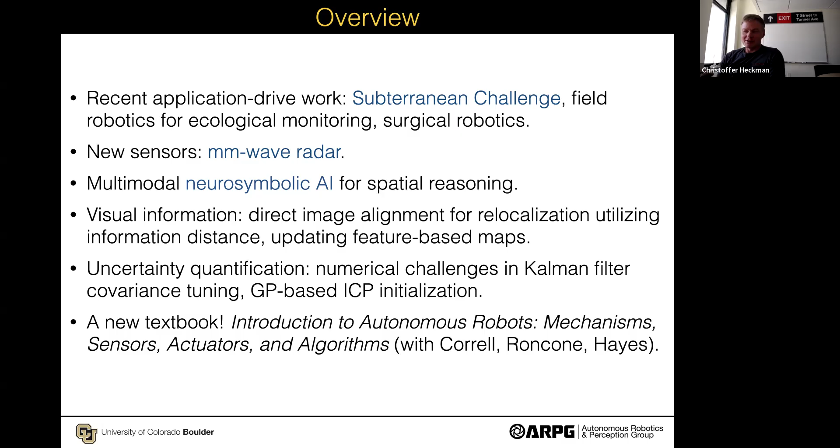The point of that book is really to give you a very gentle, colloquial introduction to the field, but also having rigor in places where you might need it. Honestly, I think that if you're pretty savvy with linear algebra and calculus, reading that book probably takes like a weekend, and that might be something of interest to you. You can just go online and compile it.

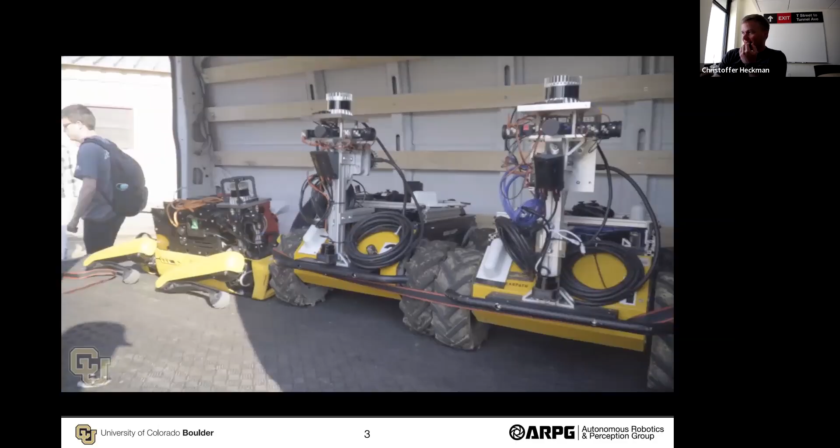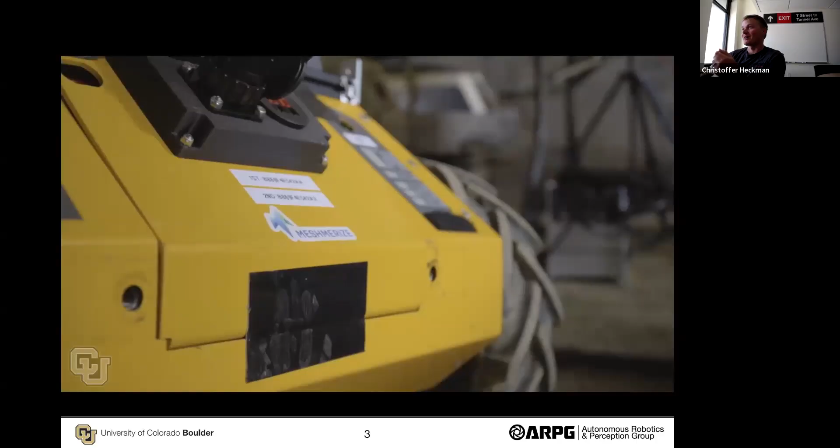So I wanted to give you first this montage. It's a video created by one of my undergraduate students of a deployment we did with some of our experimental robots for the DARPA Subterranean Challenge last year. You'll see a few things here, like that we actually go out to different sites and people wear hard hats and reflective vests, and there are robots moving around in environments that have never been explored by a robot before, at least.

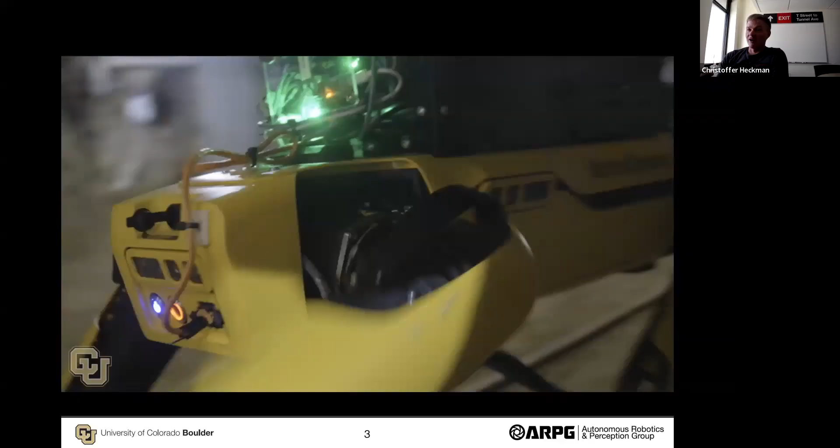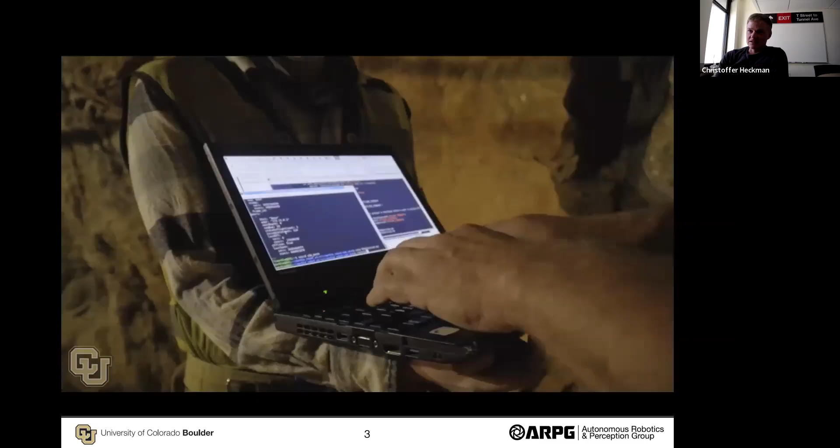This is a mine in Idaho Springs. In this case, this is one of our test deployments, a place where we collected data and refined our algorithms multiple times before participating in the DARPA Subterranean Challenge, which was a large, $80 million program from DARPA. There's a lot of dramatic music in the background that you're not hearing, but essentially we built these robots to autonomously navigate in this space.

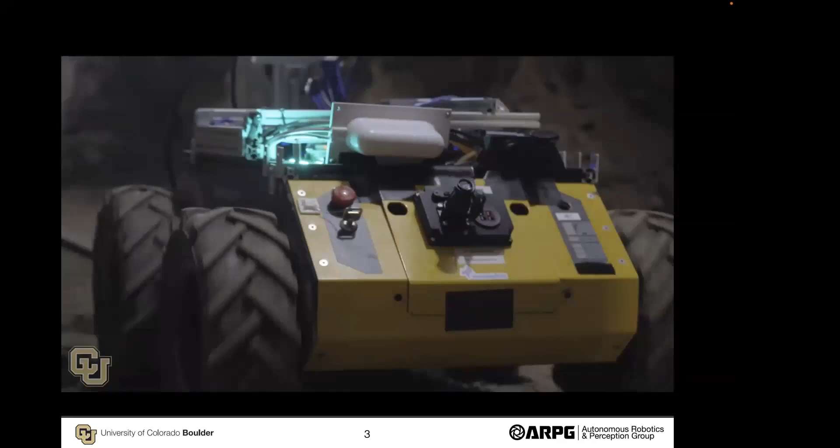And the reason why these humans are there—these are PhD students, master's students—is that they are actually looking at what the robot is doing and trying to evaluate their behavior, to see whether or not they're doing what we expect them to. A couple of different video clips follow.

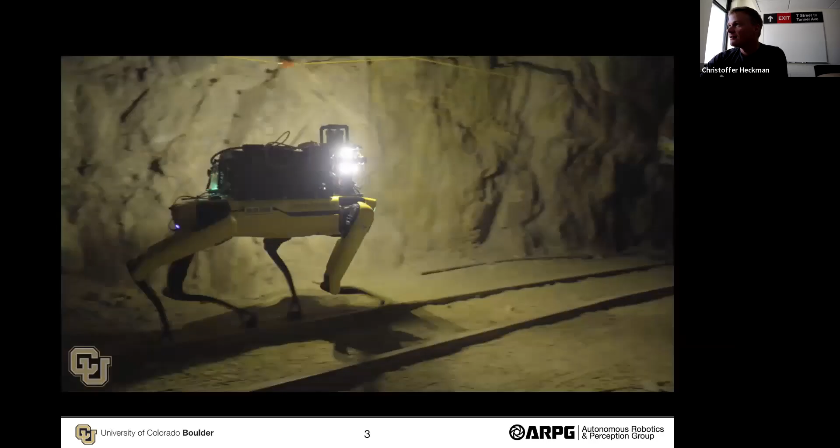Can you hear me still? I can't hear you if you're talking, Rashi. I can hear you. Okay, great.

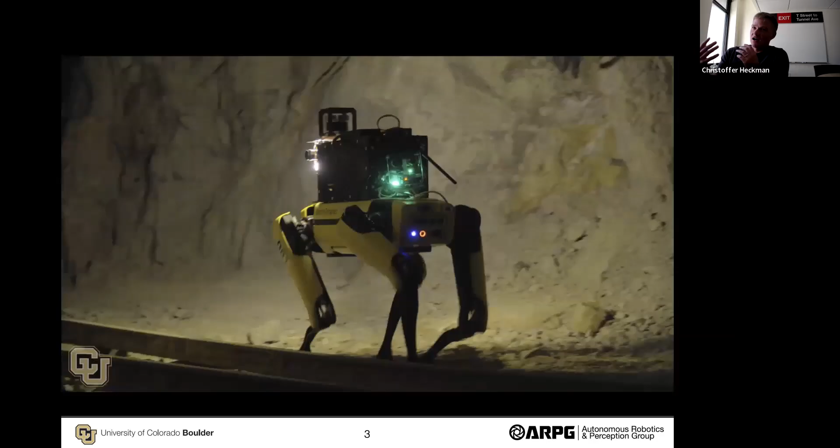So I got a button that said... anyway, someone asked me to unmute. Okay, so these robots are basically using different sensors, autonomously operating here. We have a couple of different robots that we use for this competition that are still being used for much of the research that we do.

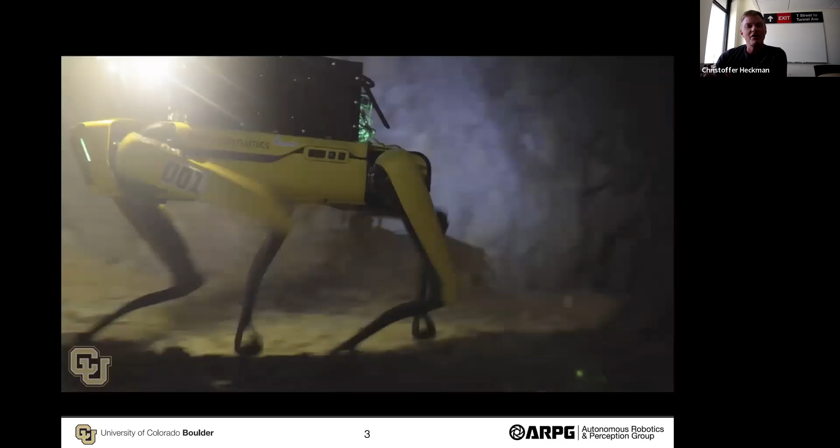We're not as interested just in subterranean tasks. That was a very motivating experience for us for this particular project, but this was actually just one of the many field robotics types of exercises that we do in our group.

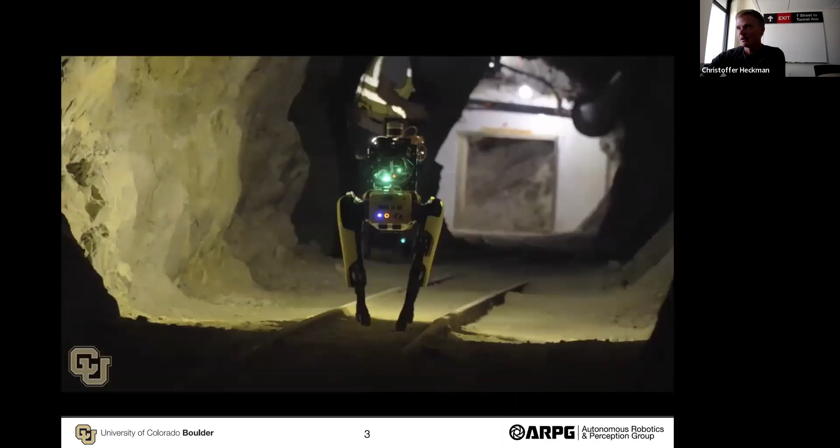So like I mentioned, this was actually part of a large competition, and our group does participate in national or international competitions that are usually hosted by sponsoring agencies like DARPA to be able to go and build and deploy these robots. A large part, like 99% of our work, is the actual building and development of algorithms that support a particular application. And then the last 1% is actually competing, which is kind of fun.

Although, you know, it's always a crapshoot whether a robot will just explode - not literally, but figuratively - just fall apart and won't know what to do.

And one part, the reason why I'm showing this picture here is because we actually do a lot of human-robot interaction work implicitly as a result of the work that we do in my group. So here's a human - we were allowed one human to interface with this whole system. And the system thereby needed to be quite autonomous.

And even in places where it was deep underground, we had no comms to the robot, the human had no power over that whatsoever. And now the robots have to work completely autonomously, or fail completely autonomously, as the case may be. But, you know, one human was allowed to have interaction with that.

And that human interface that you see here, it was not a big part of our work. It was actually pretty much built on prior libraries and everything. But the way that we designed the interfacing with the human is in itself a very deep research area, one that is also explored by Brad Hayes and Alessandro Roncone, two colleagues of mine.

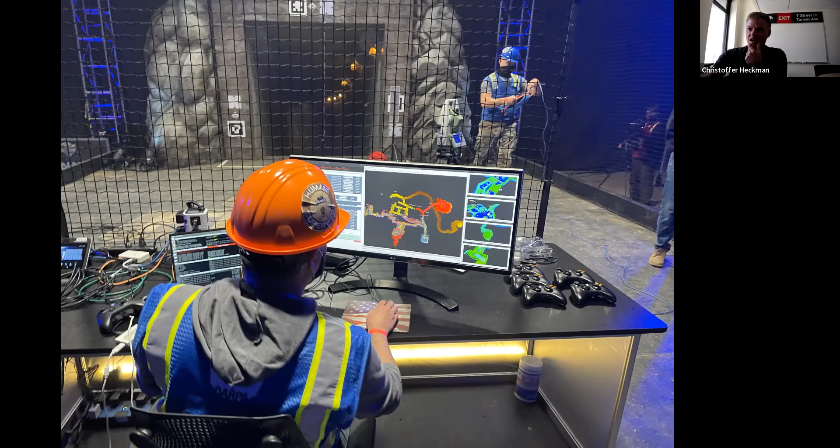Just to give you an idea, this was pretty hard, and I want to show you why I think it's hard. One of the reasons is that you have multi-scale types of behaviors that need to be exhibited by robots in these environments.

So this is one kind of algorithmic problem that you could imagine scaling in different ways. Those sorts of algorithms for planning and sensor perception, or the consumption of sensor data into data products that could then be used for navigation or other behavioral systems, is really the fundamental work that goes on in our group - not the building of platforms or sensors, but the algorithms that power perception and decision-making in these environments.

And just as another example, the types of environments we're looking at are not just quote-unquote fields, right? They're not just these places where there's some kind of natural thing to explore, working in a desert or something. They're also urban and built environments.

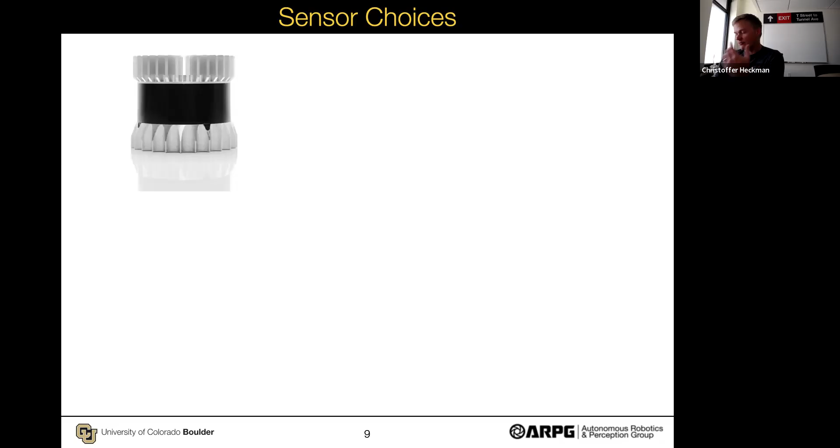When I talk about perception, I want to give a little bit of context to that. We are very interested in my group working with automotive LiDAR, working with cameras, and how we are able to parse camera data using machine learning techniques, especially modern techniques like visual transformers, and contributing constantly to that field.

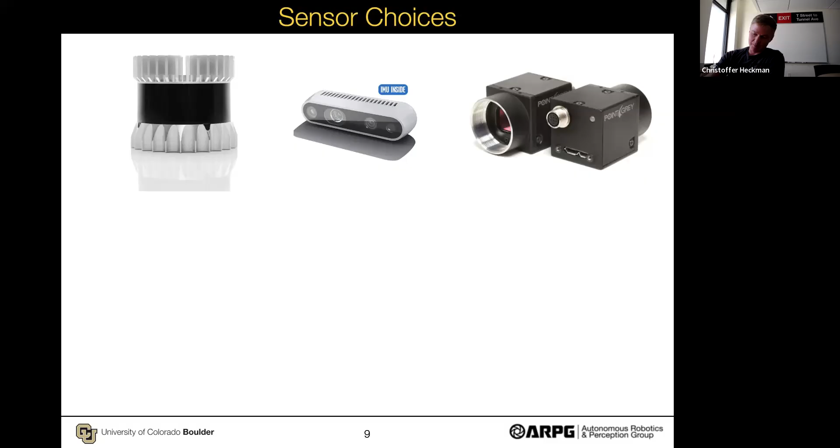We use commodity cameras, not just machine vision cameras, but ones that are cheaper and can be placed everywhere, like these RealSenses that have onboard vision and depth sensing based on stereo algorithms. We use GPS if we're outdoors, if available, and we use inertial measurement units, and the fusion of all this data together is what provides us some idea of where we are and what we're looking at.

And the co-location of these data is actually a very interesting problem from a machine learning perspective too. That is something that we focus on.

One area that is not as well researched in our view is radar, so I want to talk a little bit about radar here. Radar has been around for a long time. I'm sure many of you know about radar, but millimeter wave radar on a system on a chip that has been fabbed into a sensor, that is actually a very rare sensor. That's something that's only come about in the past 5 years or so. And so that enables us to be able to do perception with these small packages of sensors.

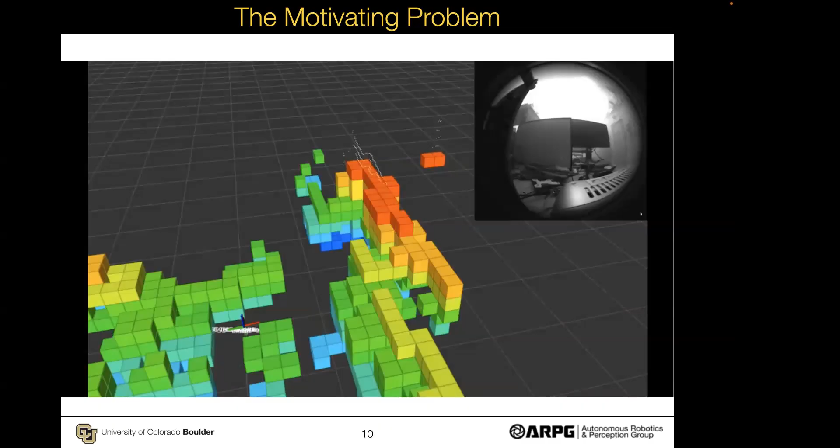So what I just showed you, if I can show again, is comparing how LiDAR and radar work. In this video, it was just this camera front-facing view, in a completely pristine environment without any fog or obscurance, a LiDAR map can be pretty dense on the surfaces of the environment, which means you can actually see where you're going and be able to use LiDAR. But in cases where there's heavy obscurance like this fog, that rainbow colored map just completely washed out the entire scene.

So what we're interested in is trying to solve problems where we can use other sensor modalities such as radar to be able to do mapping and localization in environments like that.

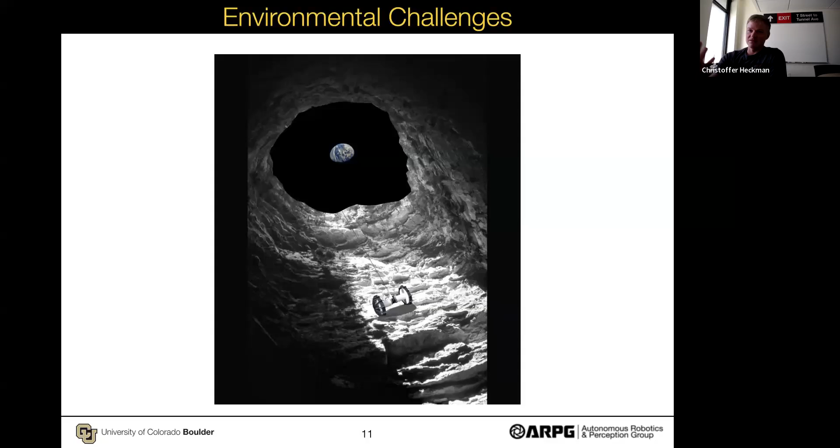And it's not just for environments such as built environments where there's some sort of disaster going on, or foggy environments like driving on a foggy day, but also places like this where we are trying to go and check out caves on the moon or on Mars, and you see all this haze, and how far can a LiDAR possibly go here? What does radar mean as an alternative for sensing?

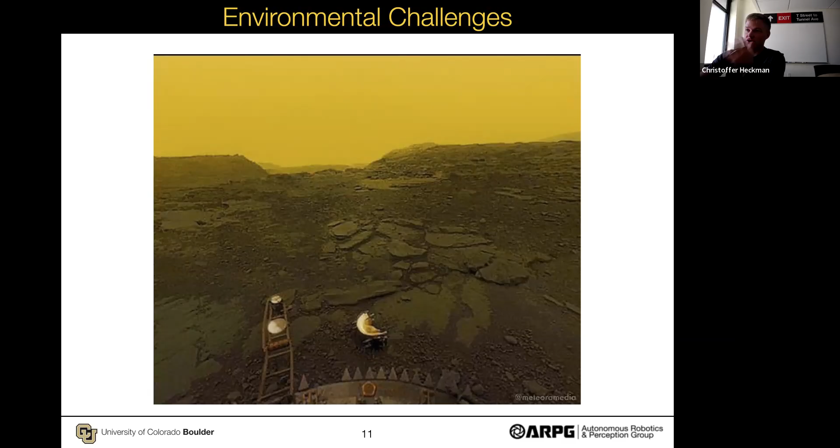I think that's more of a motivational case for us, because then we can actually see these algorithms don't have to just work in places where something has gone wrong, but also just in general supporting autonomy. And if you're in these different environments where there's a lot of obscurance going on, then how do you possibly do mapping here? LiDAR is not going to work. So we're not the only ones who've done this kind of work.

Radar has been a mainstay of some sensing problems since, like I said, 70 years ago. Recently it's moved into the autonomous driving domain, and many of you may be familiar with autonomous driving frequently relying on a suite of sensors like LiDAR, cameras, and automotive radar, sometimes in these tiny little packages used for cruise control and automatic braking. Many modern cars are built with these kinds of things built in.

These new radar sensors being built out are just directly printed onto a PCB with a chip driving the front end of the radar synthesis. They're an order of magnitude lower weight, several orders of magnitude lower weight, also lower power draw, but also orders of magnitude cheaper—each one is about $300 or so. So we have these sensors, and we're trying to figure out what's possible with them.

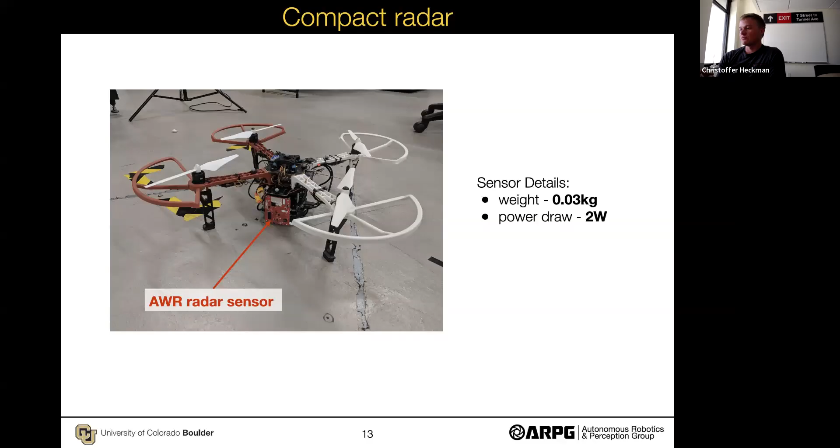Recently we've been collecting data, creating data sets for machine learning tools we're building that use multiple sensors with the supervisory signal of LiDAR, an IMU, some cameras, and multiple different radars, comparing and contrasting them.

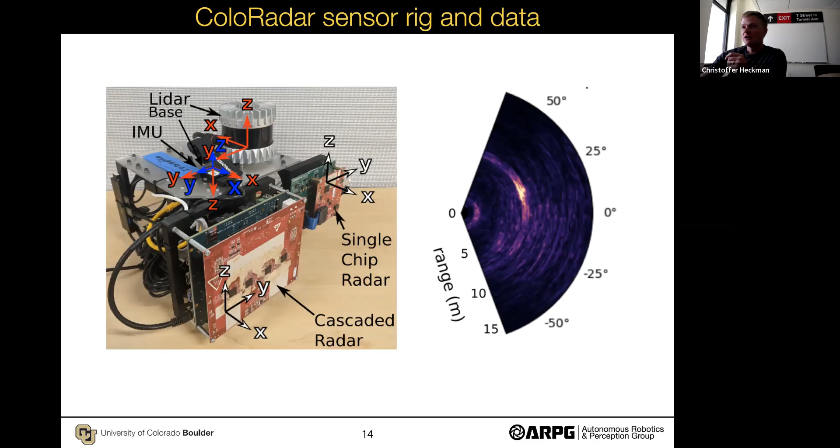Something to see is that the data coming out of this can come in many different forms, like in a 2D slice of what this might look like along a range and azimuth image. You'd have maybe a high intensity return of some object sitting over in that light white area of the image. If I wanted to show a video of this, that can sometimes be helpful.

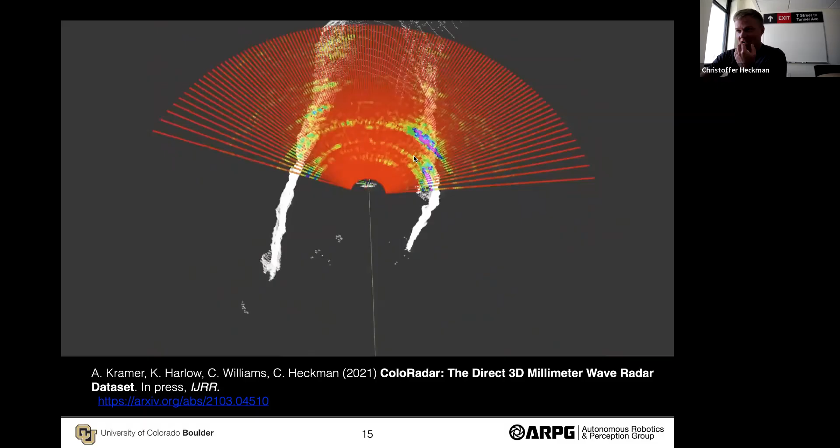But they're also presenting some really significant challenges from a signal processing standpoint and also downstream machine learning tasks, including these ringed bands of returns that appear even in places where there are no objects. Being able to come up with novel machine learning techniques to reduce the noise in these, and to work over this very novel domain—this range and azimuth domain, rather than a 2D image domain—that's some of the ideas coming up in the work we're pursuing.

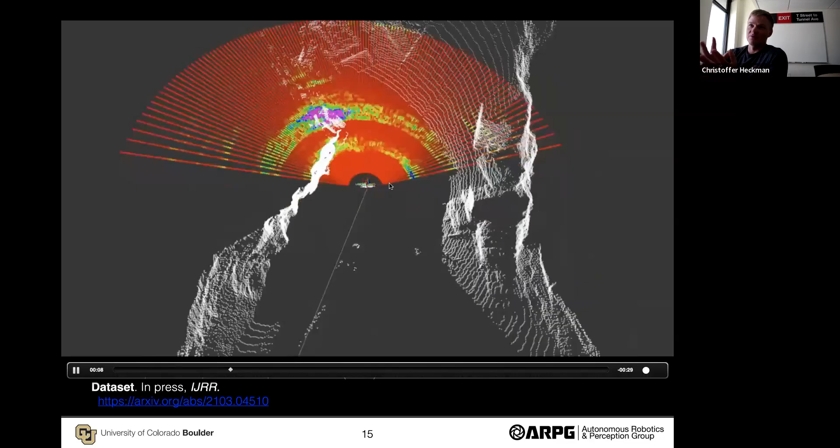Here you can see just a video of if we walk the sensor forward, you can see how these radar scans evolve with respect to how the 3D scan of the environment evolves. This should give you some hope that radar can work, but also show some opportunity when it comes to algorithm development, especially when we develop data sets like this.

One last thing is we actually have deployed this on a real robot. So this is a quad rotor, and in this case it's only being controlled using this radar inertial rig that we have—that's the fusion of millimeter wave radar from that one sensor, as well as an inertial measurement unit. And it's able to do station keeping.

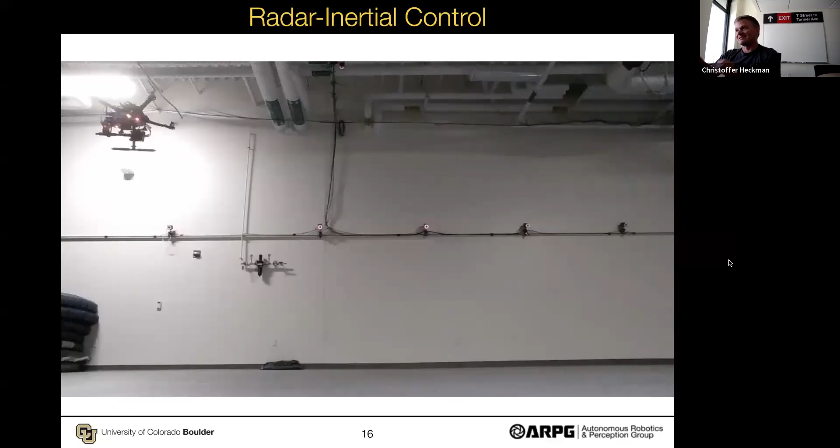Station keeping, which is basically just hovering in one place, building a map of its environment, and trying to go in a figure 8 in this case around this trajectory. The motion capture cameras, if you're wondering, are used purely for the purpose of ground truthing our algorithms. So in this case, we're actually able to navigate using this radar inertial rig alone.

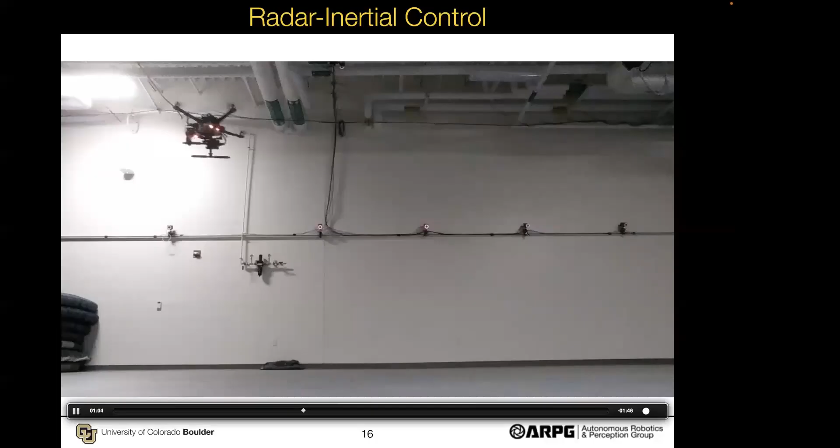Some recent work we've done is also focused on the metric side of this. The metric side means the ability for us to actually extract 3D maps, as well as get state estimation, X, Y, Z, relative yaw, and velocity. And from that, we were able to go and reconstruct the positions and orientations of the robot and follow navigation systems as a result of it.

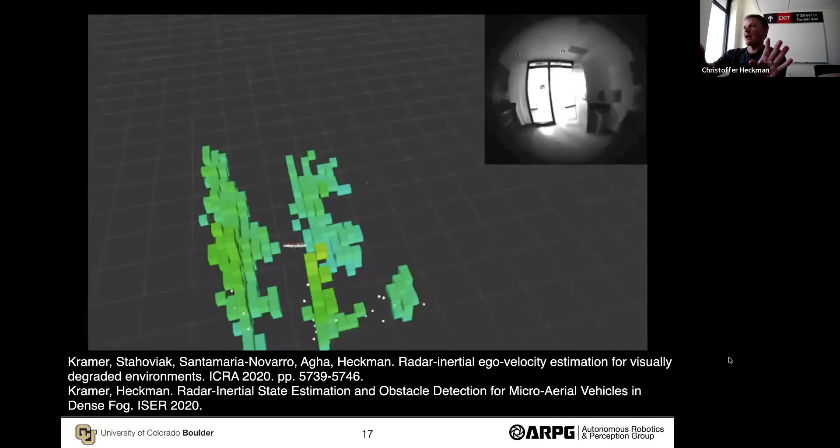So here we have this 3D mapping system based purely on the radar returns, and that's those green blocks that are coming up, which correspond with the walls in this corridor that we're walking down. The white little dots are actually places where there are radar returns. So this noise filter that we've created from a point net classifier, which is a 3D convolutional neural network, is rejecting those outliers and then being able to build these dense maps that correspond with obstacles, things that we should avoid in a control sense.

So you can see sort of how all this plays together. One last comment - this is the last project I can talk about today before I take questions. We're not only interested in the metric.

I'm going to talk a little bit about a project that I have with natural language processing collaborators. This project is motivated by the general problem of how we understand videos, images, metadata, and speech and text in a unified framework, so that we can come up with comparative understandings, or what we call hypotheses, of what is going on in a scene.